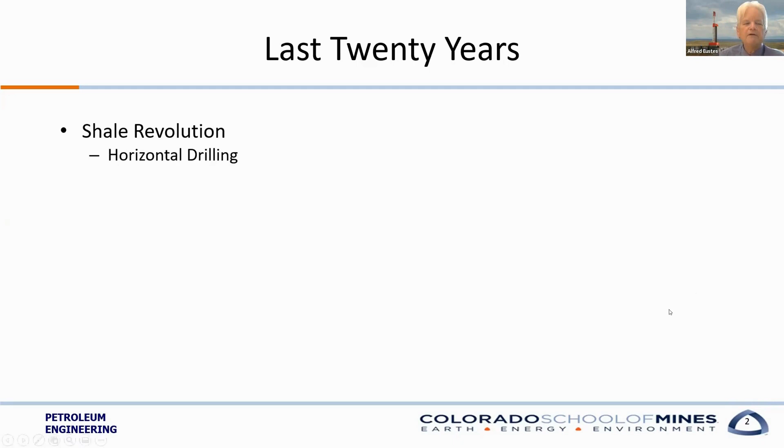So let's see what was going on. We'll start off with, in the last 20 years, it's been amazing, the shale revolution. George Mitchell put this together back in the Barnett Shale in the North Texas area, northwest of Fort Worth, Dallas. As they say, it took 17 years for this overnight success to happen. What they did was basically create a couple of technology changes: horizontal drilling - instead of just drilling straight through, they actually turned it and went 90 degrees by oil field convention. Then the completion techniques that were used, the use of casing strings along that horizontal section, the types of production equipment, and finally, fracture stimulation.

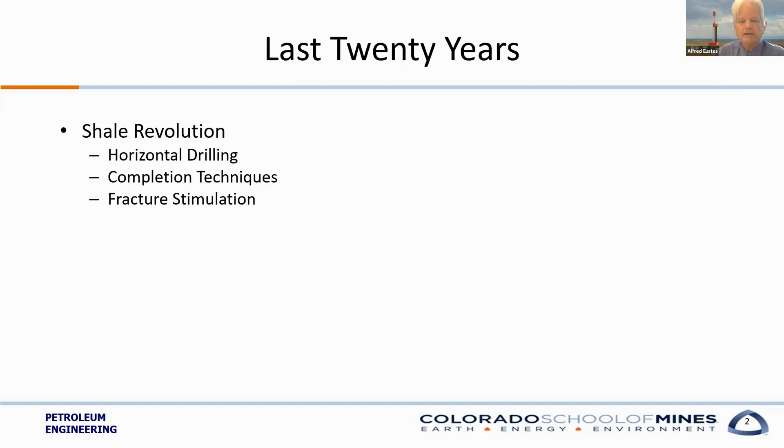We're drilling into rocks that basically had the same permeability, or actually less permeability, than sidewalks. So the idea was to create these fractures that would be, in essence, a superhighway for the small little dirt roads to feed the hydrocarbons into the reservoir, into the wellbore.

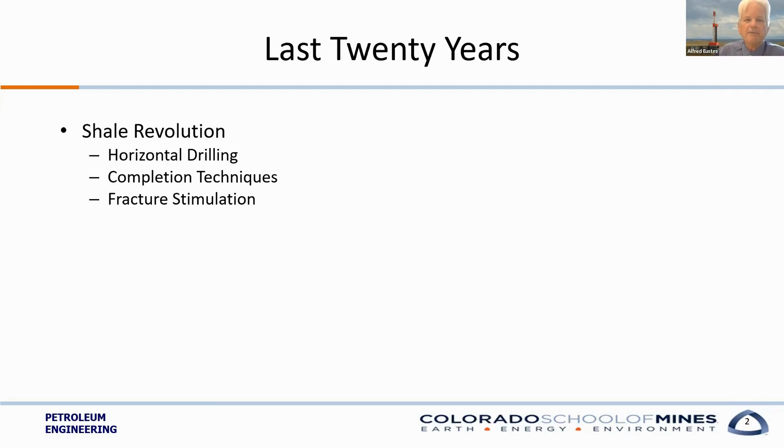What I'm going to focus on is the technology. I'm not going to look at the politics, I'm not looking at the issues of regulations and whatnot. I'm just going to focus on the technology that I see will be the enablers, and the continuation of those enablers as time progresses.

Let's start off by looking at the big areas that we see. This is from the Energy Information Administration, the EIA, with the different types of reservoir areas, basins that are being developed today. We typically see the big one is the Permian - that's where a lot of the oil and gas is being developed today. If you look at rig count, you'll see a boatload of them. The Niobrara here in Colorado and in Wyoming is a big area. Of course, the Appalachians with the formations in Pennsylvania, Ohio, and West Virginia. The Haynesville, which is super hot there in North Louisiana, East Texas.

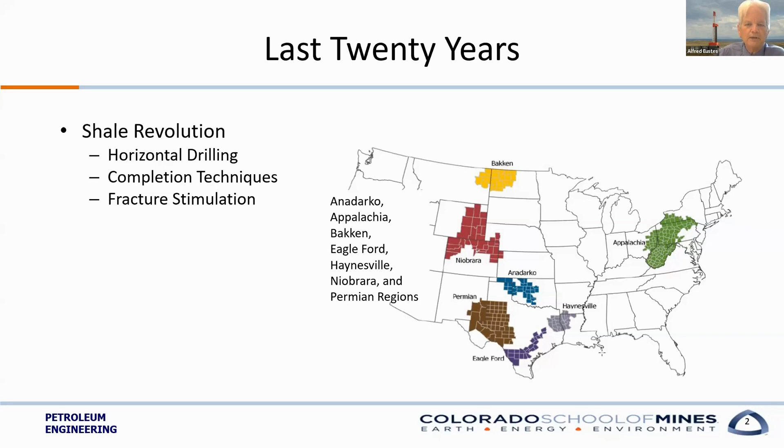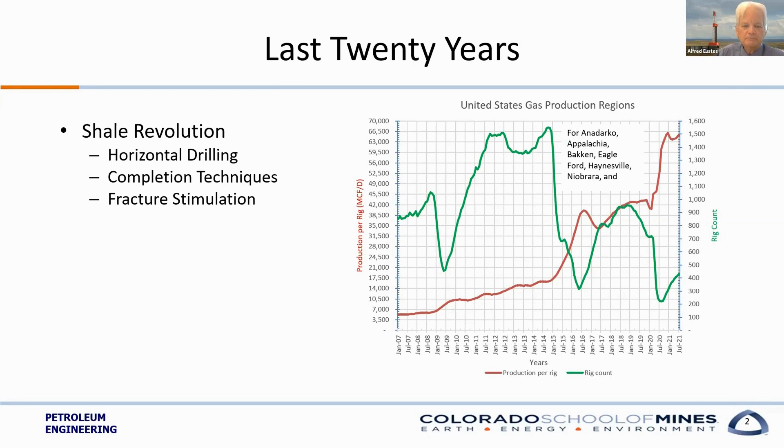And the question is, why is that? Is this a fluke? Well, if we look at the gas production, you can see the same sort of thing. You see the high volume of rigs and yet not real high production per rig. And yet around July of 2021, you're seeing maybe 430, 40 rigs and yet much, much higher production per rig. So this is not an anomaly.

What you're actually seeing is the focus of the technologies that we've used today. And this focus is going to be on horizontal drilling for our talk here. So what are the drilling enablers that have allowed us to spur this shale revolution? It starts off with drilling rig technology.

It starts off with drilling fluid improvements and the way we've done that. The bit designs are amazing, and how we apply those bits have been phenomenal. The directional drilling control and its equipment have been a real factor in this, as well as drilling data analytics, as well as drilling management.

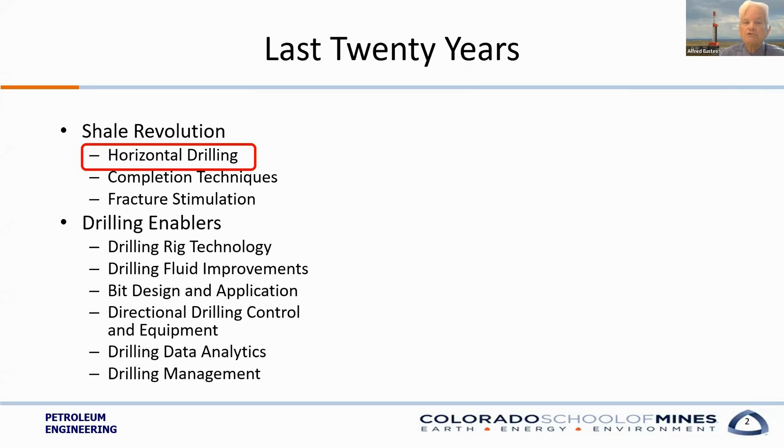So what we're going to do is focus on each one of these and see where they stand today and where they may be heading in the future.

So first question, what is a mad well? One of my good friends has talked about this. It's called a mad well. Is that an angry well or an insane well? Actually, what it is a mile a day well. That is, they can actually drill 5,280 feet or more in one day.

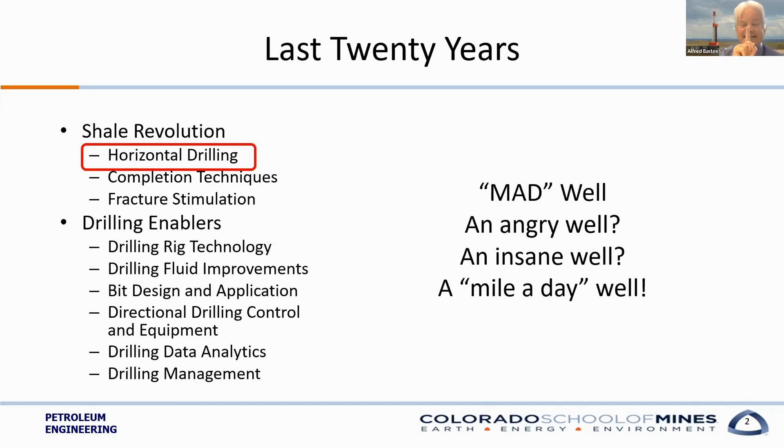Amazing improvements in operations. So let's talk about drilling rig technology. The first rigs I broke out in are now museum pieces. They were driven by mechanical means. They had Kelly drive systems, which are mechanical. Frankly, they belong in a museum.

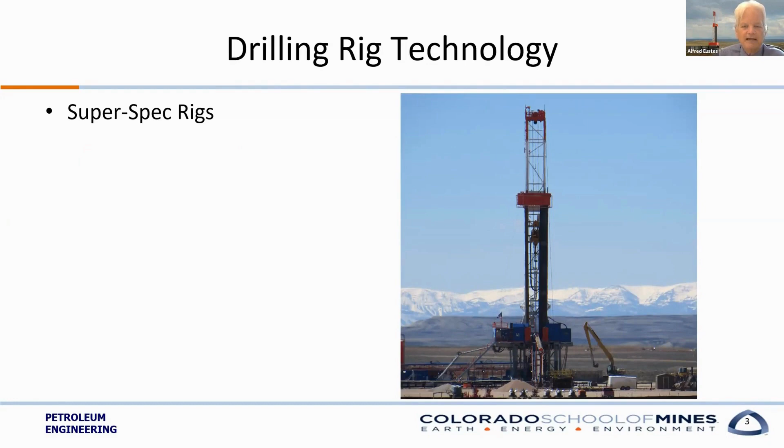Today we have super spec rigs, which are basically rigs designed to make drilling far more efficient, with a lot of stuff associated with them. The power requirements have gone up phenomenally. Back in August of 2008, most rigs were in the 500 to 1,000 horsepower classification, the hoisting system and the power associated with them. Today, it's doubled to 1,500 to 2,000 horsepower.

So what we're seeing is electrification instead of mechanical rigs. Typically what you'll see are diesel electric type of rigs. It used to be AC to DC power. Today we're seeing AC to AC synchronous power, which is allowing for far more efficient operations of drilling rigs, more horsepower, more power, faster drilling. In fact, you put more power into a rock, you're going to drill it. There's no question about that. So it's been amazing, that change of electrification.

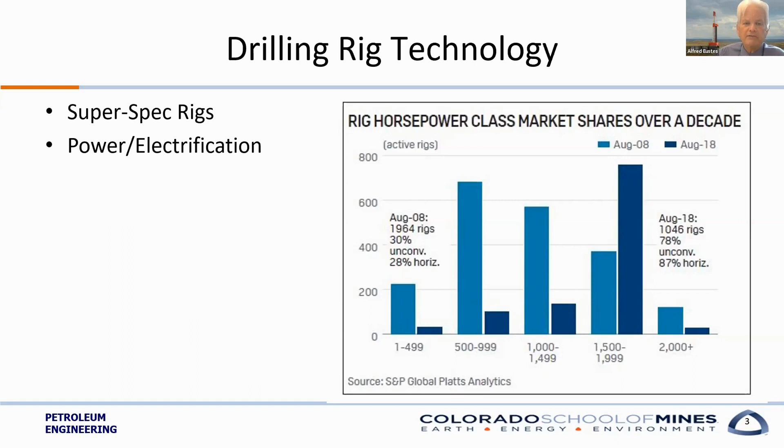One thing that's nice about electrification is that if you don't have a diesel electric system, you can also hook it to the grid, straight into the grid, and use that same power to power the rig. What's nice about that is it's a little bit more quiet, instead of having diesels running, you're just off the grid. Of course, you have to have the right locations for that to happen.

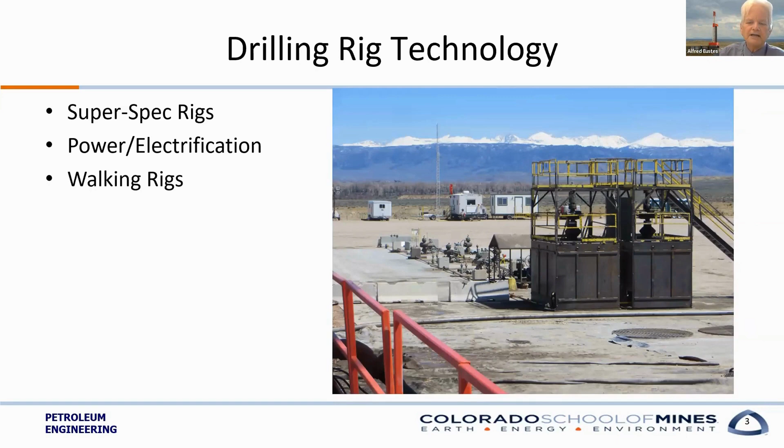Another thing that's fascinating about super spec rigs are the walking capabilities. If you notice in this picture, taken up in Wyoming, you see a whole series of wells in a line, and you can actually see them stepped over to the side. That's because rigs actually have feet these days where they can push down, shove over, and then set down.

So instead of having to disassemble the rig, move it over, and set it up, they can simply pick themselves up, walk over, set down, and drill the next hole. Even with stuff standing in the derrick, they can pick themselves up, walk over, drill, set down, drill the next well.

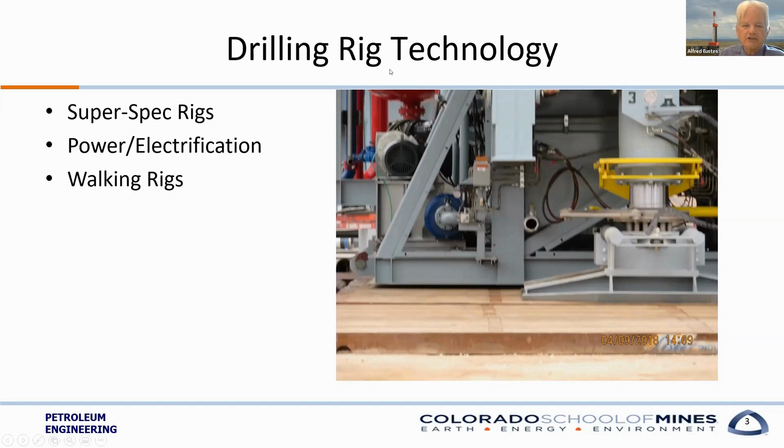In that respect, you can do what they call batch drilling, where you drill a whole series of, say, surface holes, that first section of hole with the same diameter, drill a whole set, walk back, drill the next section of holes, set them back, drill the last section, whatever number of holes you've got. What's nice is it's got amazing efficiency: keep the same equipment, drill a bunch of wells, and change the equipment out once instead of a whole bunch of times. So walking rigs are a big factor in drilling rig technology enablers.

Drill controls are really improving. It used to be all mechanical. You had big lever arms you used to control the brakes, throttle switches, and all that. Today it's almost all computer controlled, which means you have a lot more variability to tune in the right values.

And what's more, you have the information coming back to you so you can see what's going on. What's really nice is you can record that information for future reference.

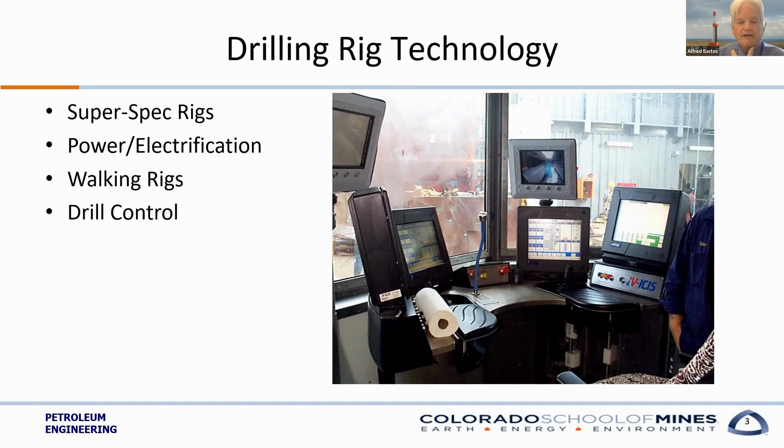It's pretty amazing, isn't it, for those drill controls? This shows you one for an offshore rig. I look at this and it just amazes me when people say, oh, the oil field technology, that's old hat. The answer is no, it's not. Look at that joystick control, complete operational visibility, being able to see what's going on.

It's amazing the changes in drilling control. They even let me, one time on an H&P flex rig, operate it. I'm just a drilling professor, and they said, there, go ahead, it won't hurt. So I actually ran the draw works to lift the blocks up, and they had a special device to keep me from banging it up at the top. It's amazing what they can do today.

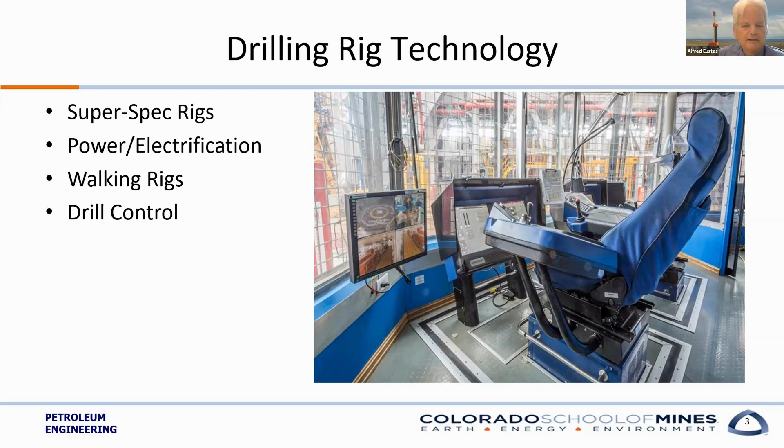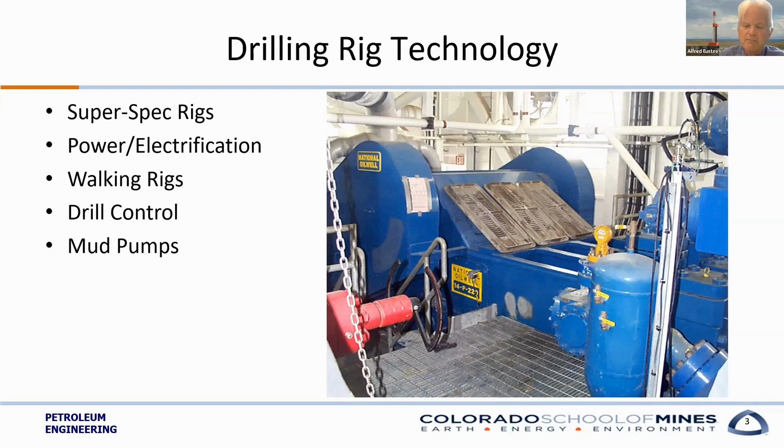Pumps—you've got to move drilling fluid through the system. Back in the day when I was running rigs, if we had a 3,000 PSI pump, wow, that was big. Today, with all the different power users downhole, such as mud motors and measurement-while-drilling tools, you need a lot more power down there. The way you do that is by pumping fluids at very high rates and very high pressures, and the net result is you see a lot of 7,500 PSI mud pumps these days. So it's not unusual to see big mud pumps out in the field.

The other thing we see today, as I mentioned about the hexagonal Kelly drive which slid up and down while the device rotated around it—today rigs have their rotation system actually ride up and down with the rest of the rig equipment as it slides up and down. These are called top drives.

Top drives can be electrical or hydraulic, and they run about 1,000 horsepower. They can be infinitely variable—instead of being fixed at some RPM, you can really dial in the numbers, and that makes a huge difference. The other advantage is you can continuously circulate, pumping fluid, even while you're moving the pipe in and out of the hole. So that saves a lot of issues there. Top drives are another drilling rig technology enabler.

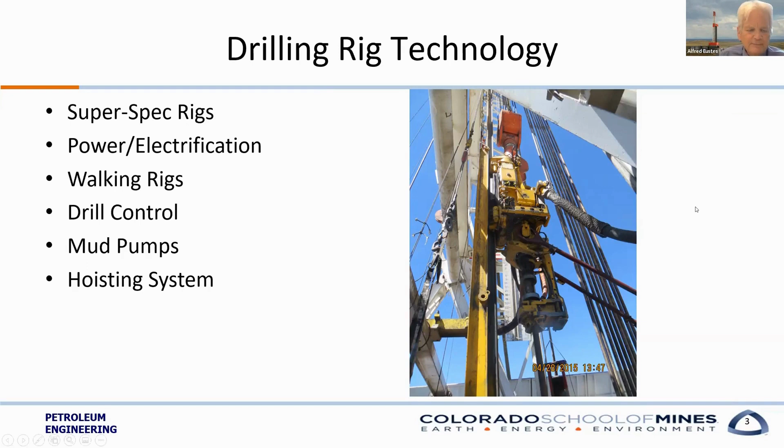Another area is rig automation. What you're seeing there, that little red thing, that's a robot. That is what they call an iron roughneck. It's used to go and actually screw the pipe together or unscrew it without having to move that piece of equipment off to the left called a tong, which is a very dangerous piece of equipment. Today, it's all robotic.

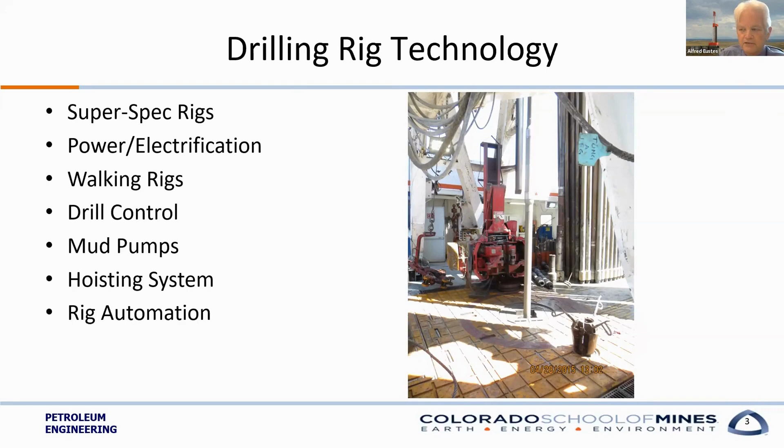And because it's robotic, and you have sensors to measure what's going on, you can automate it. So a lot of technology is being developed to automate these operations. Today, they have what they call drill-a-stand, where you can push a button and it will drill one stand, which you see on the right standing up, automatically from the time you make the connection to the time you make the next connection. Pretty amazing, and it's continuing to improve as time progresses.

Drilling fluids is another area of improvement. In the past, it was pretty much either water-based or pneumatic-based, basically air drilling, or oil-based. And when we talk about oil, we're talking about diesel. Talk about a nasty environmental hazard. Well, chemical improvements have made drilling fluids far better. In fact, it's apocryphal, but I always think about 70% of the problems you get with boreholes is probably related somehow, some way to your drilling fluid.

And so today we're seeing a lot more of, instead of a true oil, crude oil or diesel, a really highly refined synthetic, basically a linear alpha olefin or some sort of glycol mix or something far more benign to the environment and especially to humans drilling these holes, because some of these holes are really long.

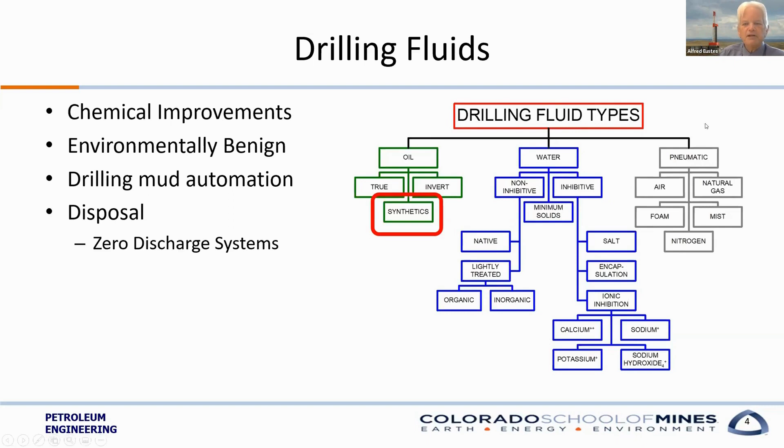And when you go horizontal, you could be going out 15,000 feet or more, in which case, imagine taking a piece of pipe and laying it down on a highway for 3 miles, and then rotating this end and expecting the other end to rotate along with it. Clearly, I'm going to have some sort of friction reducer. That's where the synthetics help, because they act as a reduction in friction so that my torsion is not so high that I twist the pipe in half, or I can slide it along and push it into position so I get force on the end of the bit to actually drill. Pretty good stuff they've got these days.

Another thing we're starting to see, which our friends at the University of Texas, Austin, have been developing, is drilling mud automation. In my day, you used to go out and measure the thing with a little funnel, which was pretty worthless, measure a weight indicator and so forth, and you'd have to have a crew out there to do that. It got done maybe once a day. You need better control. So this device is used to measure on the fly, as you're drilling, the different mud properties, the drilling fluid properties you want to keep track of in real time, such as your density, which is mud weight, your viscosities, your gas contents, and so forth.

These are drilling mud automation systems used to measure that, and if you can measure it in real time, you can also record it. That's another useful piece of information we'll find out more about shortly.

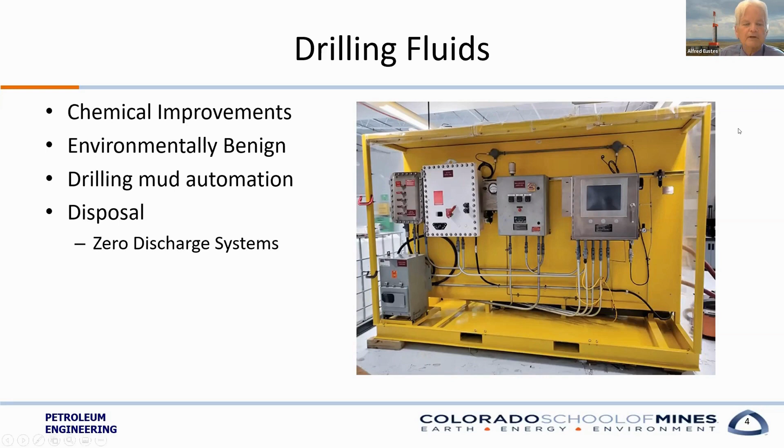The other issue, back in the day—44 years ago—we had these giant pits. Talk about an environmental nightmare. These giant pits would be there, and all the drilling fluid would wind up there, all the thread dope and oils from the rig, as well as the tobacco juice from all the roughnecks spitting into it. The net result was an environmental nightmare.

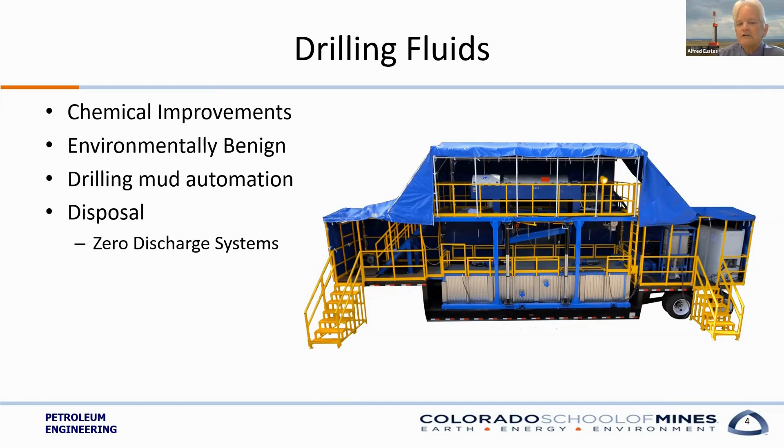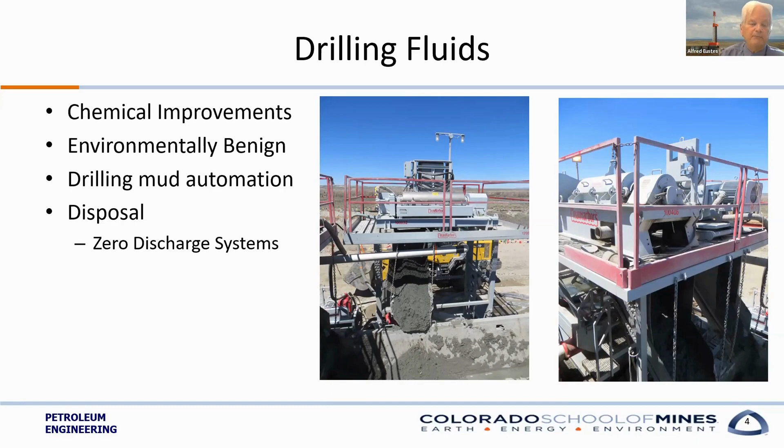So zero discharge systems are also very small. You can see it's basically a truck with some of these pieces of equipment on it, so you can have much smaller environmental footprint. That's a useful device, to say the least.

One of the big technology enablers I see is the evolution of bits. Back in the 70s and 80s, tricones were the king. They were like 80, 90% of the technology used in drilling, and if they lasted 120 hours, I'd be amazed.

The development of the polycrystalline diamond compact, or PDC bits, back in the 70s was actually designed by GE and the DOE, working on trying to come up with a better drill bit for geothermal drilling. They weren't that good at that time, but as the technology changed, you started to see an improvement, and people started saying, these things are diamond bits, they should last a long time.

So what they would do is design these bits specifically for a given formation so that they could drill efficiently within that formation. You can't have just any old bit drill any old formation and expect it to perform efficiently. You've got to tailor design it.

One thing about tricones is they're really tough to design because they're machined. PDCs are actually molded, so you can develop the mold and immediately change the design however you want - number of cutters, position of the cutters, number of blades and so forth - and change that relatively inexpensively. These things can last a really long time.

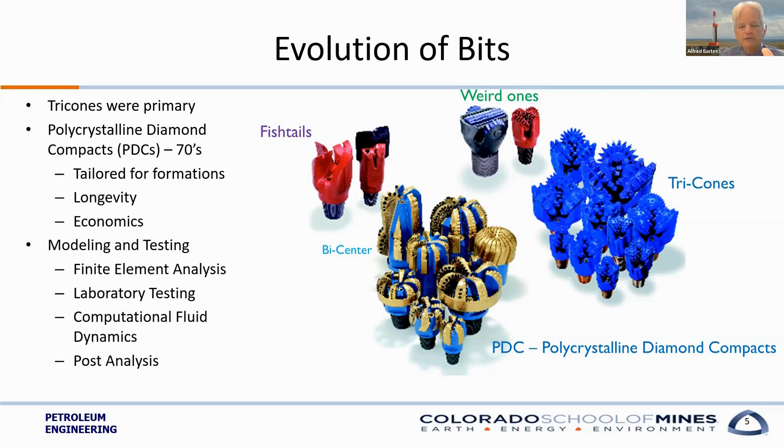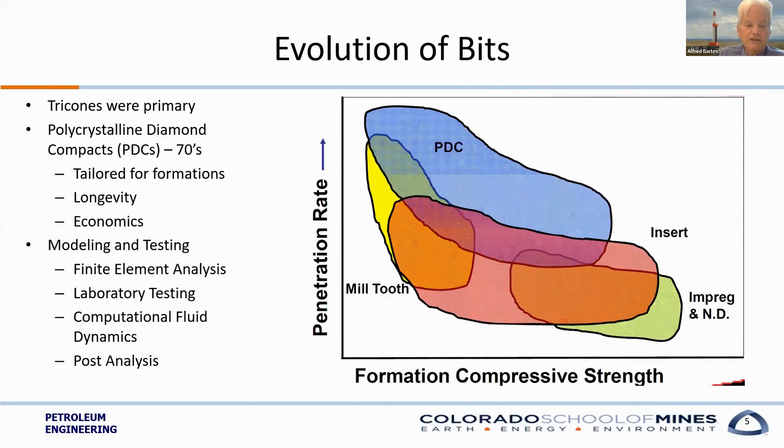If you get into really hard rocks, like drilling in geothermal, typically you get impregs and natural diamond bits. But the PDCs are primarily more in the sedimentary rocks - you're starting to see them used, and they're much faster. What's interesting to me is I'm starting to see that right edge of the PDC envelope pushing more into the harder formation compressive strengths, which you're going to see with the geothermal operations coming up. Here's an example of a post-analysis.

If you look, that's a real drill bit. That's a polycrystalline diamond compact. You can see the inside cutters are in pretty good shape. The outside cutters are pretty tore up. In fact, some are missing, some are cracked and so forth.

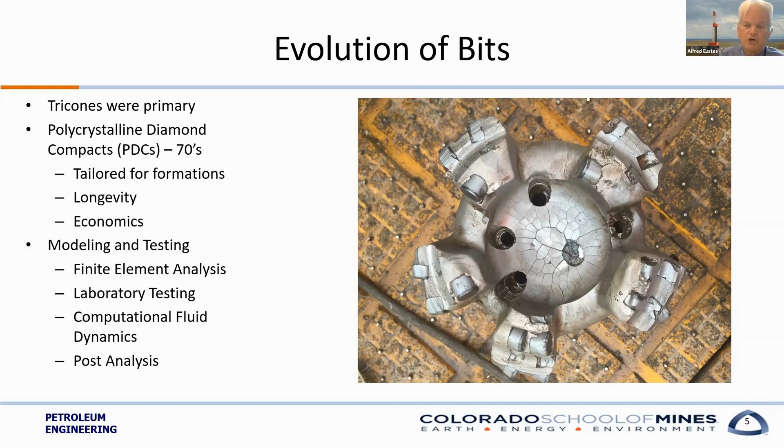That's probably a sign that this thing has been whirled. In other words, it kind of spun like this, and that outside edge probably got the tar beat out of it. So what does that say? Well, that says I need to do a better job of balancing the bit, as well as I probably have to speed it up, because whirl is typically because I'm not pushing harder on it. You know, I've got to push much harder on that bit.

How about the directional drilling? One of the things we're starting to see is improvement in drilling mud motors. Mud motors are devices that you put as part of your drill string right next to the bit. And as you pump mud through it, there's actually a rotor in there that has one less lobe than the stator it's in, which means it's got a gap in there. And that gap is a cavity that, as it spins, is a progressive cavity. So in other words, I pump mud in there at high pressure and it kind of pushes that rotor out of the way. And as it does that, it spins the bit. And that's where we need the power from the flow rate and the pressure to be able to get that thing to spin. Those mud motors allow us to do directional drilling.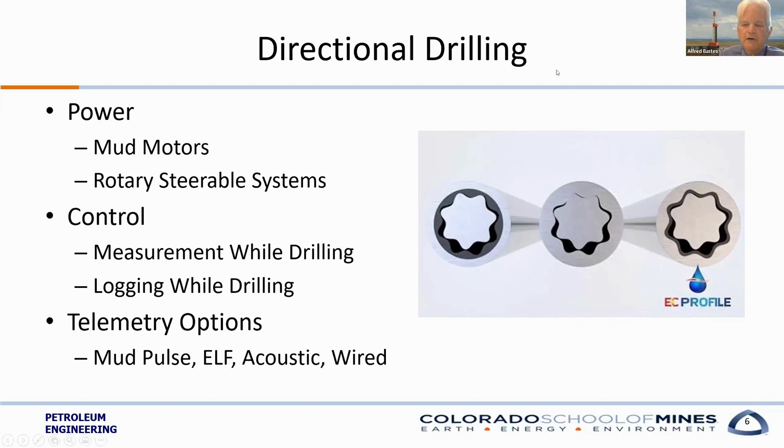One of the big ones that I see is the use of rotary steerable systems. And I'm going to back off that for just a second. Let me finish up with control. And that is one of the technology enablers: being able to measure what you're doing while you're doing it.

You know, it used to be that you would drill and you would end up basically kind of guessing what you were doing. Today, we've got tools down hole that measure what's happening. Which way is your bit pointing? What kind of forces are you putting on your bit? What kind of rotational speed have you got? How hot is it? Which direction is it going, and so forth? These are amazing technology enablers that basically is kind of like driving a car with your eyes closed versus being able to see where you're going.

In essence, measurement while drilling is doing that. And more importantly, it's also being able to keep track of where you are within the formation. That's logging while drilling, by using gamma ray or other measurement techniques that have been around a long time. But in this case, the logging tool is integral with the drill string, so you're busy measuring the properties of the formation while you're drilling. So if you happen to get out of the formation, you'll know it, and you can turn it and get it back into the formation.

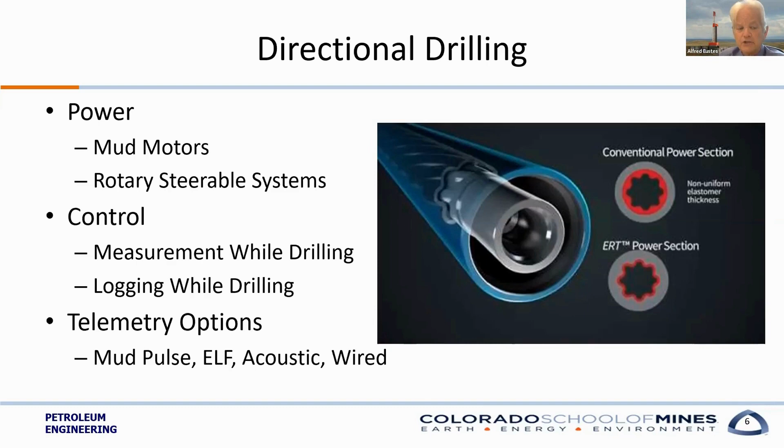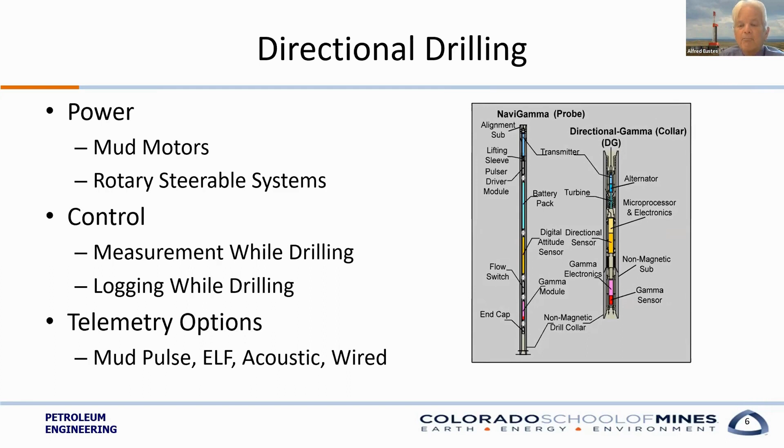You'll notice that in one case you have a battery pack for power. The other one has a turbine with an alternator to keep the power going downhole. So that's another reason you need those big mud pumps, to pump enough hydraulic power down to control these things.

Here's an example of where you might use an LWD tool. You've got the tool down there measuring the resistivity, the gamma ray, maybe the density and neutron if that's what you want. Because you're supposed to know what you're in, right? You know the characteristics of what you're drilling. If you get out of that, you can just admit, oh, geez, I'm up high.

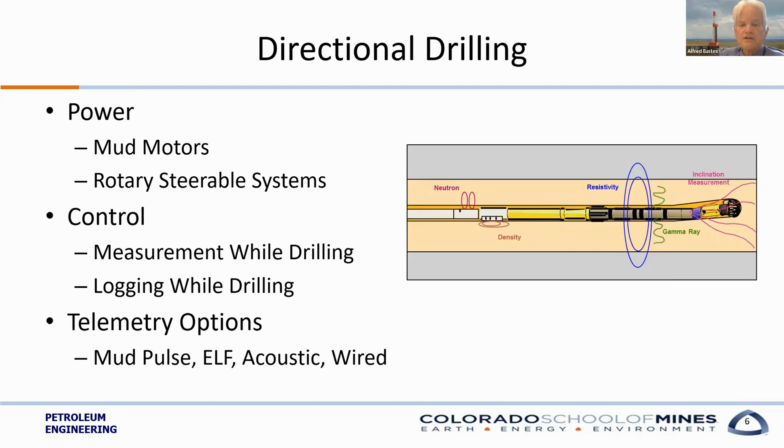I'll turn the bit and come back down, or turn the bit and go back up, or whatever it might be, or if I cross a fault or something like that. So this helps tell me what I'm doing.

The other thing you might see is telemetry options, such as what we see today, a lot of mud pulse telemetry, where they change the pressure in the system. The system is pumping mud at a relatively constant rate with a fairly constant pressure, and this causes pulsations in that pressure, so you get a pressure wave.

In that pressure wave, you can interpret what's happening. If you have a pressure wave up, it's like a 1, down might be a 0, back and forth, and you get a binary code like 1 0 0 1 0. Using that binary code, you can then decode what the machine is trying to tell you.

The future includes faster means, because right now you only get about 40 baud out of it. My PC Junior back in 1984 had a 300 baud modem, and we get maybe 40 baud, maybe better sometimes.

But there are better tools being developed. You've got extra low frequency radio waves, which are kind of limited to the same baud rates, but it eliminates the need for pressure pulses, which was good for air drilling and so forth.

Acoustic telemetry is also being developed, where you imagine hammering on the bottom of a piece of pipe, bang, bang, bang, and you hear the waves as they come back to the surface. You can listen for it, but the signal to noise ratio is kind of low, so that's kind of tough.

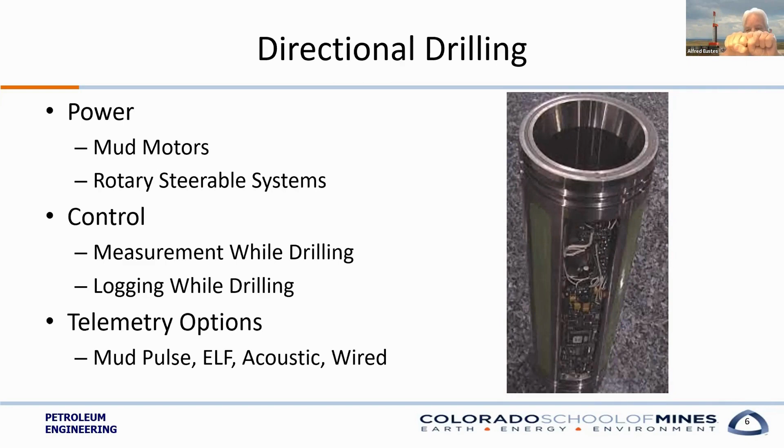Wired pipe has been very popular offshore. We actually have a physical wire that goes down to the sensors downhole. The problem is you can't have a direct connection back to the surface, because you can't screw the pipe together with a wire running through. So when you screw the pipe together, it butts up against each other and they use an inductance coil instead. That tends to make them kind of pricey.

Now let's go back to the rotary steerable system. This is a big one, and I think it's going to be a lot more of the future. When it comes to directional drilling, I can sum it up fairly easily: you either point the bit in the direction you want it to go, or you push the bit in the direction you want it to go, and more than likely you do both. So that's what these tools are doing.

As I mentioned with the mud motors, basically they have to be stationary relative to the borehole with the bit on an angle, so they sit there like this. I have to orient that thing in the direction I want to go, and push it as well as point it in the direction I want to go, which means I can't rotate. Well, that's called a slide. But if I want to go straight, I just rotate the whole thing, and the bit's sitting there wobbling back and forth, without any preferred direction.

Those of you with an engineering background probably recognize static friction versus dynamic friction. Static friction is like when I put my hand on my desk and push - it doesn't go anywhere until I push hard enough and it slides. Once it starts sliding, the friction goes down. That's dynamic versus static friction.

Mud motors that are in slide mode have a lot of friction associated with them. If I could somehow continue to rotate my string, it'll be in continuous dynamic conditions, and with that dynamic I can basically push it further.

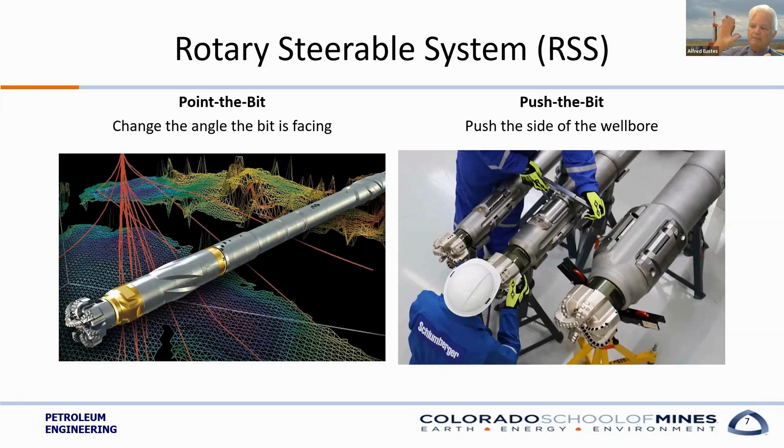Rotary steerable systems are designed to either keep the point of the bit as it rotates - it's kind of like the bit's pointing this way, and as you rotate, the bit's rotating backwards at the same speed. The net result is you're pointing the bit in the direction you want it to go, versus push the bit. If you notice on the right, you see little flappers on the side, especially that big one. What happens is it flaps out when it wants to push in that direction, and then as it rotates around, the flapper goes back in. So it's flap, flap, flap, flap, basically pushing the bit in the direction you want to go.

Drilling data analytics is a big one, and I'm seeing a lot of this right here. There are many sensors, both downhole and surface. A couple of these pictures are ones I've taken on the surface - the flow indication shows how much flow is coming out, the weight indicator shows how much force you're putting on the bit, as well as how much is on the rig, how fast you're pumping which says something about your flow rates, and how fast you're rotating - there's a sensor for measuring that.

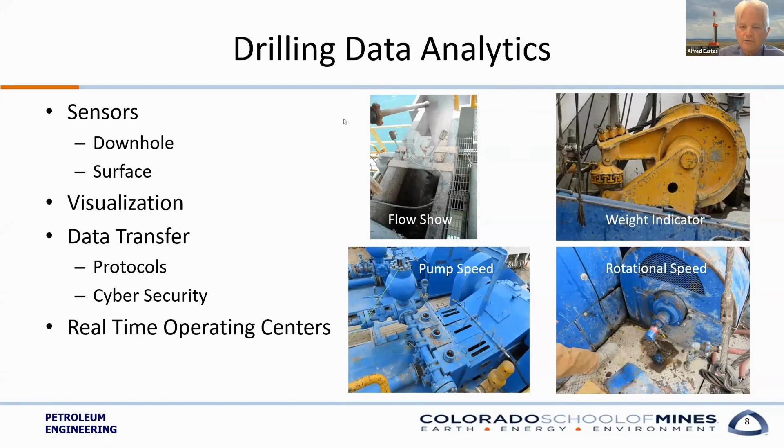Being able to measure that, as well as downhole as already mentioned, has been useful, because then you can measure and present this in terms of visualization. These are the current visualization techniques - you can see it's linear charts as well as digital outputs and so forth. Typically these things are push button that you can do.

What's kind of useful about this is, as I mentioned, you can record this and transfer that data to wherever. So you could be halfway around the world, pull out your phone, dial into whichever company you're using, and be able to see what's happening on your rig in real time.

Pretty amazing. The only thing I have an issue with, and this is something I know the industry is working on, is keeping hackers from being involved - cybersecurity. That's a big area that I think needs to be addressed.

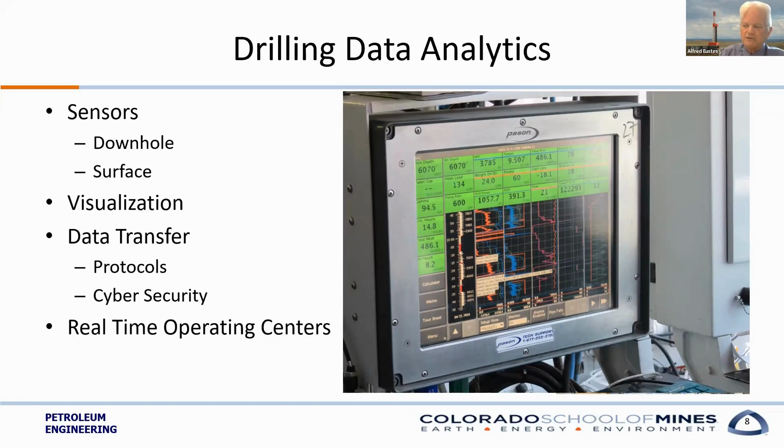As I mentioned, you could sit there and watch these things in real time. What you could do is set up an office somewhere and have very experienced subject matter experts watching a whole series of operations going on, whether for drilling, production, stimulation, or whatever. These are called real-time operating centers. They were very important, but I'm starting to see them slough off a bit. Instead of being physical, especially post-COVID, people are just doing it from home, where they can actually monitor what's going on in real time.

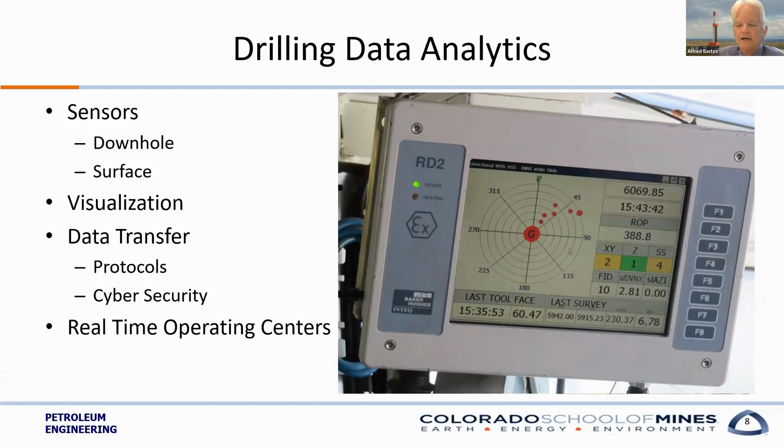Here's an example of real-time directional drilling. You can actually see where they're measuring what's happening - you've got the depth, the time, the tool face, which is not an insult - it's basically which way the bit is pointing. At 60 degrees, it's kind of going up and to the right. It gives you all sorts of information about what's happening while you're drilling.

So you use this data - what am I going to use this data for? Well, there's a thing called mechanical specific energy. Imagine how much energy it takes to break a unit volume of rock - basically energetics. If it was perfect, it'd just be the compressive strength of the rock. So if I've got 10,000 PSI rock, I'd have 10,000 PSI worth of energy that I would use. Well, that's not quite true, but it's close.

You've got a lot of energy in there. And that energy basically shows how I'm pushing into the system and making the operations faster.

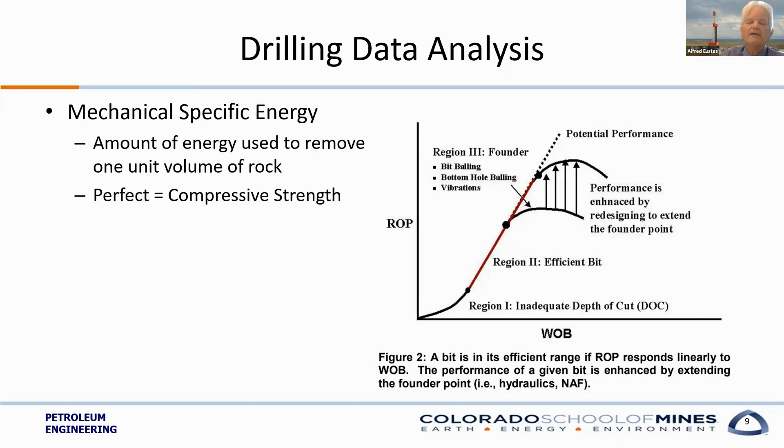What I can do is look at the weight on bit, ROP, and that mechanical specific energy, and determine whenever you see it dive off of the linear trend, that orange or red line, that's an indication something is going on that's limiting me. By using drilling data analysis, I can analyze what's limiting me and redesign the system to eliminate that. Then when I get back to drilling, I'll drill faster. I reach another limiter and continue that process until I get this thing going as fast as possible. That is what drilling data analysis, among many things, does for you.

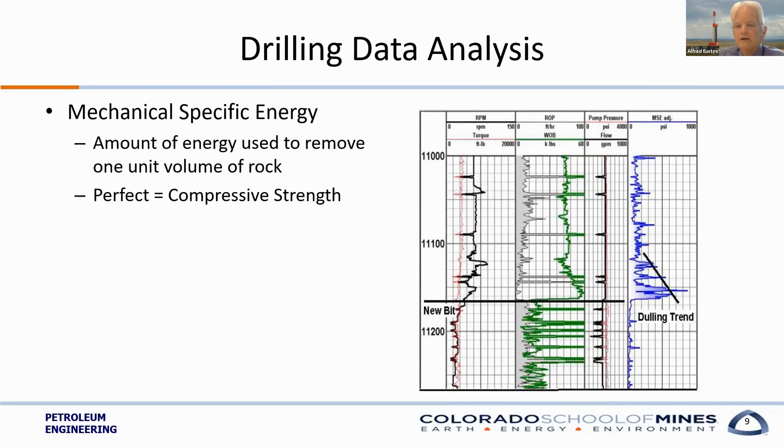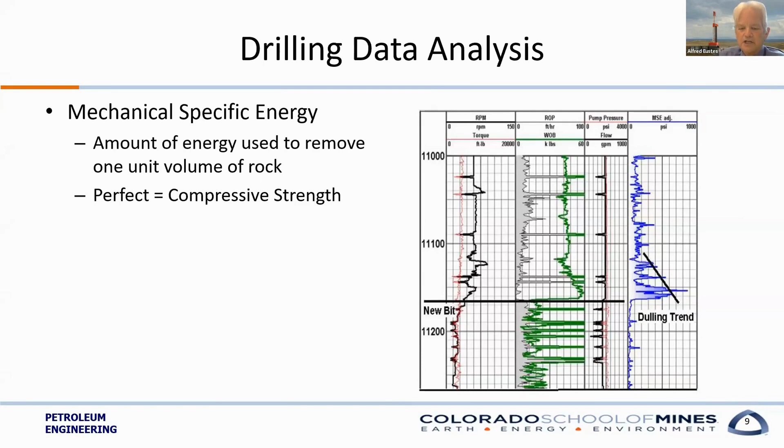Here's an example of the MSE. If you look over here on the right, you see that MSE trend versus depth on the left. You can see the other operational parameters. Notice the energetics are increasing as you pass 11,100. Why? The bit's wearing out. You can see the bit's wearing out, so they say, time to change our bit. They change it to a new bit, and you can see the energetics are far better in terms of less energy per unit.

Another example is vibrations. When things happen downhole, here's a start to vibrations and all that kind of stuff, that's a lot of energy being wasted. That's not going into rock penetration, it's going into moving all that equipment downhole. By changing the RPM, changing the weight, and doing other things, you can basically eliminate those vibrations or at least minimize them. Or in this case, they actually broke the bit and had to pull it out of the hole.

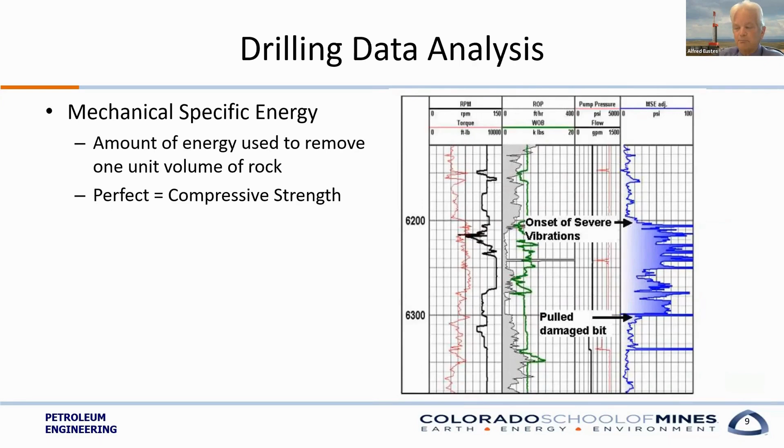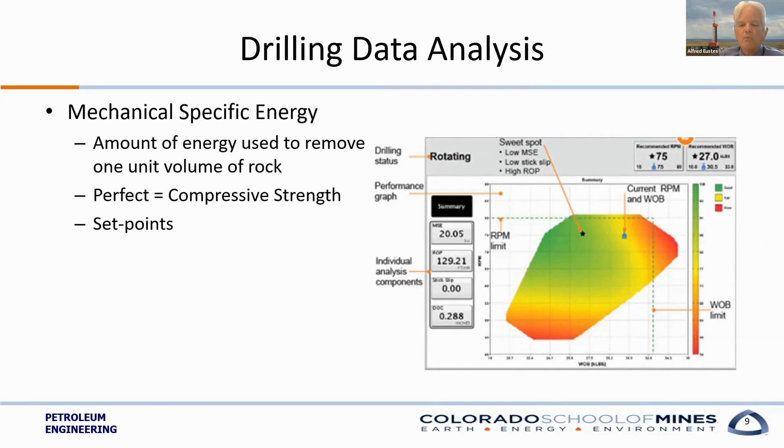What you can do is develop what they call set points. Set points are the perfect RPM and weight on bit that give you the best energetics, meaning the lowest mechanical specific energy, the lowest vibrations, and the highest ROP. By doing this analysis, you can figure out, maybe I should be a little lower. The RPM looks okay, but maybe a little lower weight on bit allows me to drill better. Doing this drilling analysis, like this heat map right here, is a perfect example of where I might be able to do better.

When I look at the other issue in drilling data analysis, drilling is productive because I'm creating a wellbore. Running casing is also productive, even though I'm not drilling, I'm still creating a wellbore. But if I lose circulation, stick my pipe, the wellbore collapses on me, or I take a kick, these are called non-productive times. If you can define them, good luck on that - sometimes that can be challenging. The idea is to minimize that.

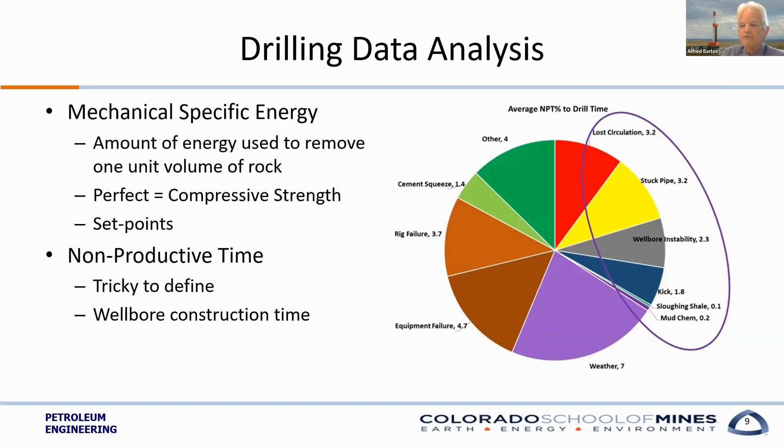For instance, if I have a lot of lost circulation, like we see with geothermal wells, if there are ways to minimize that, that's less wasted time. Time is money. So you're starting to see where we spend a lot of effort looking at the drilling data, trying to figure out at what point does it make sense to really spend our time on sloughing shale. Well, not according to this - we're only getting like 0.1% of my drill time, but lost circulation is about 3.2% of my time. Stuck pipe is another problem. So these are things to look at.

Drilling management, one of the things we look at is defining key performance indicators, or KPIs. By doing that, you can say, okay, what am I wanting to improve? Say, for example, ROP - and I'll warn you, there's a lot of interpretation with ROP. You might say, that's just how fast you're drilling. Really? Minute to minute? Second to second? Are you talking rig to rig? Spud to rig release? What are you talking about for ROP? Same with NPT - that's a tricky one to define too. Is slow drilling NPT, or is it just part of the drilling operation? That's a good question.

And so one of the things we look at is what we call days versus depth.

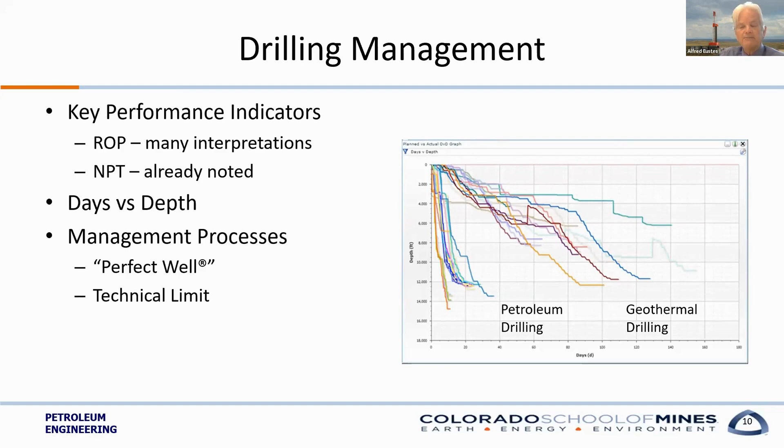You notice those areas where it looks kind of flat - a lot of times that's defined as your NPT. This is part of a report we put together for NREL on geothermal drilling, and it's interesting to see the efficiency of petroleum drilling versus geothermal drilling. A lot of the flat times you see for NPT are lost circulation events. So what does that tell me? I've got to manage my lost circulation on these geothermal wells, among other things.

There are many different technologies and management techniques out there. I'll mention two. J. Ford Brett, president of Petroskills, defined something called perfect time - basically, based on your rig, how fast can you drill a hole, how fast can you get out of the hole, how fast can you do casing and cementing safely and environmentally benignly, based on the physics of the situation. The perfect well would be one where the actual well drilling time divided by this perfect time approaches 1.

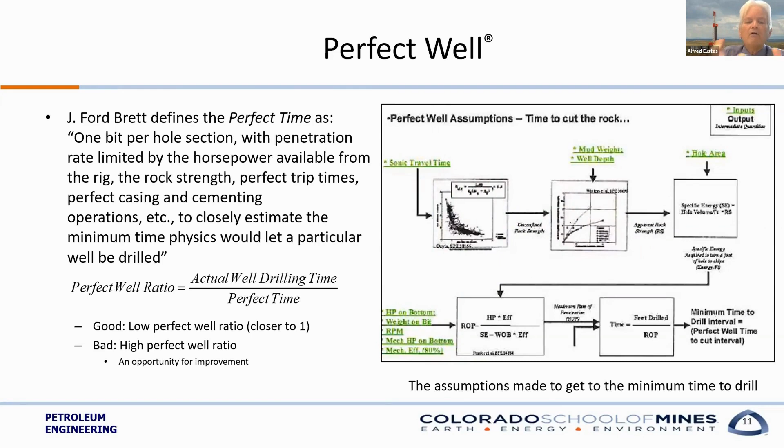Basically, it's a way to look at how close are you, and what do I have to do to get better at that. Another one is called the technical limit. It's basically including human expectations, hopefully not your biases, but it supposedly describes an ideal standard of drilling given site-specific conditions - like here in Wyoming, a perfect team, perfect drilling conditions, perfect tools and so forth. The idea is that technical limit is how fast you can drill if everything goes right. This evolves and you must continue to update it.

One thing I find very interesting - John de Wardt, a good friend of mine, has been working on identifying different aspects of lost circulation, lost time. For example, you've got conventional lost time, or NPT, as we defined it. But there's also what they call invisible lost time. Imagine if it takes you 5 minutes to make a connection because the devices you're using are clunky. Wouldn't it make sense to improve that so you can make a connection in 3 minutes? That 2 minutes is invisible lost time - you wouldn't see it, but you can visualize it.

When you look at actual well durations, you've got the best of the best, and then best in class. Best of the best is, within a field, the best one we've ever done - we should be able to hit that every time. Best in class might be the types of wells you're drilling. The technical limit is where you eliminate as much invisible lost time and NPT as you can. The maximum theoretical performance is when everything goes right - good luck on that. And then, of course, instantaneously creating a borehole - in that case, you wouldn't be going to the Colorado School of Mines, you'd be going to the Hogwarts School of Mines, because that's the only way that's happening.

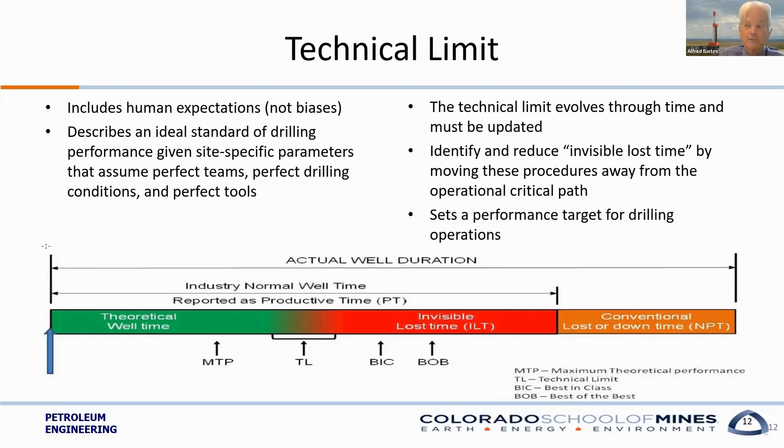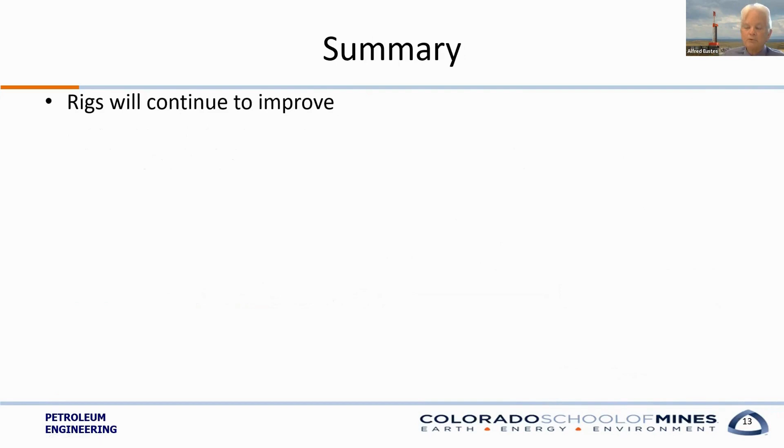So let's sum up everything I've mentioned today. I think rigs will continue to improve - they have to. You're seeing a lot more improvements, the technology being developed, improved, changed. The way I see it, rig automation will continue to grow. If you're part of the Society of Petroleum Engineers, join the Drilling Systems Automation Technical Section - you'll learn far more about rig automation there, that's where the state of the art is. It's fascinating, and there are other technical sections in the SPE you might be interested in. I see rig automation continuing to grow. Is it challenging? Absolutely. Is it difficult? Yes. But there are roadmaps out there, and I encourage you to go hunt them up.

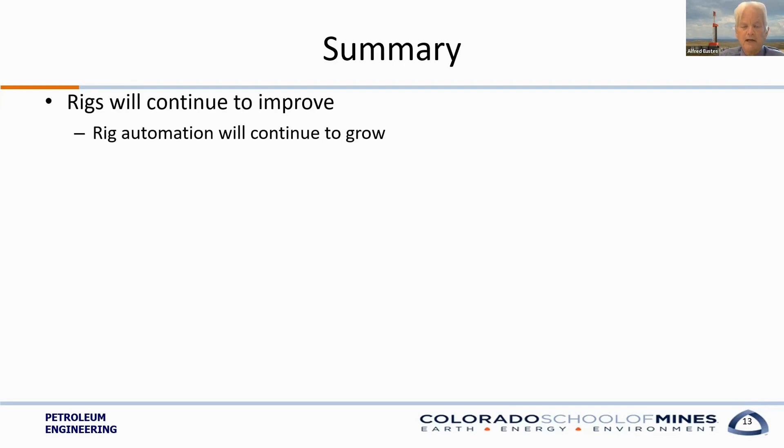Bit design and drilling technology and processes will continue to allow for faster drilling. It's amazing the changes I've seen. I remember being out on a rig a couple of years ago and noticed the top drive coming down - I thought, good gravy, are they tripping? No, they're drilling. Amazing stuff. And it's all because they've got the right bit design for the right rocks, the top drives, the mud motors and mud pumps, and the directional drilling equipment all just humming along.

So what does that mean? Shorter location times, which is, in essence, when you start thinking about environmental impact - if you're drilling a well and it takes you 2 months versus 7 days, which one is going to probably be better? The 7-day well.

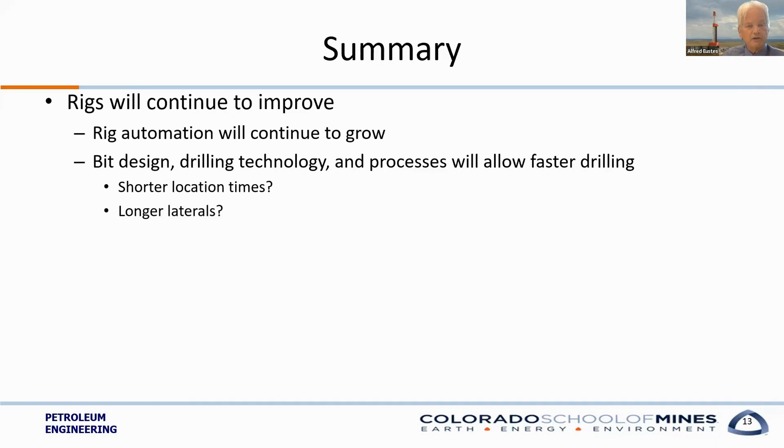Get longer laterals. Right now, 10,000 feet is pretty common. 15,000 feet is pushing the edge of the envelope because of friction issues and so forth. Could it be 20,000 feet? Maybe more. Who knows? And maybe we might even get 2 MAD wells, that is 2 mile a day wells.

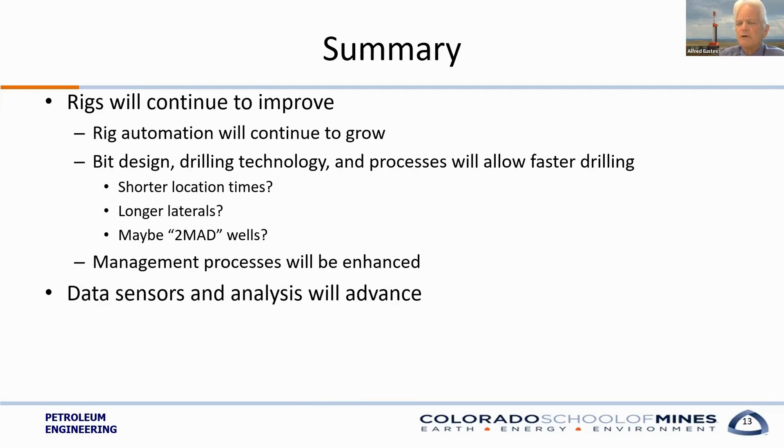Who knows? Management processes will be enhanced. You see a lot of this if you go to conferences around the world in drilling and so forth. A lot of companies have developed drilling data analysis to come up with better ways to manage it, because data sensors and analysis of that data will advance. Data sensors right now are probably one of the limiters on drilling rigs because they have to withstand a lot, and the sensors are not picking up great data, but they're useful.

I think drilling data analytics will uncover insights that will improve operations that we never thought of before, never been able to come up with before. I think you'll see that as time progresses. I know here in academia, where I'm part of, we do a lot of this kind of figuring out what's going on. I've been working with NREL on a project on that.

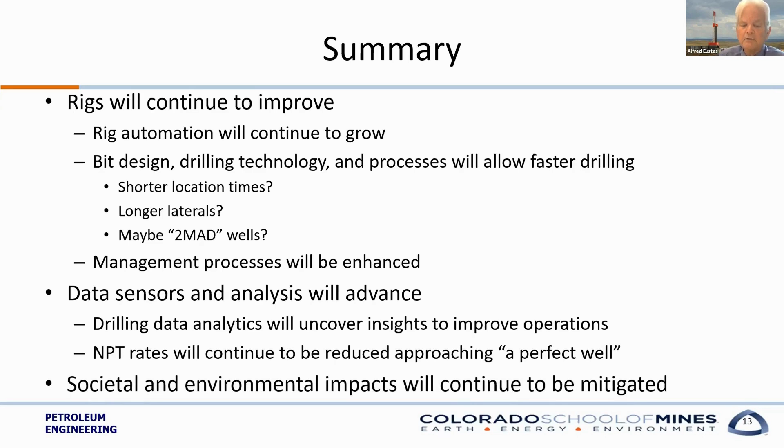Very fascinating to see. NPT rates will continue to be reduced, approaching that perfect well condition to be able to do the best job that they possibly can. And I do believe the societal and environmental impact will continue to be mitigated as time progresses.

It's been a lot of fun. I really appreciate being able to share my thoughts on this and what I visualize the future may bring as we drill into the future. And I would invite any questions I can answer, or I can question any of your answers, whatever you wish.

So with that, thank you very much. And John, how do we go from here?

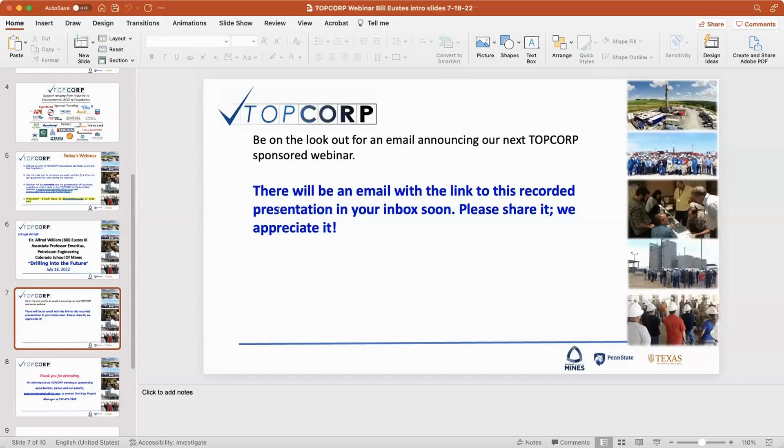I'm going to read this, Bill. Maybe you have access to it as well. I haven't read this one over first. It says, one topic that was not discussed today was cementing into the future. The industry is, at this moment in time, seeing the shift from API Class A cement to Class L blended cement, while at the same time, the construction industry is seeing their ASTM C150 type cement being changed to a blended cement type. Now, there's a lot of acronyms there. Do you have any insight into concerns related to these cement changes? And how might we make analysis today on how these new cements will perform in the future?

That's actually an excellent question. I hadn't put cement in there because I hadn't seen a real change in cement for the last 200 years. I mean, we're still using Portland cement, for goodness sake. I do know, I think it was one of the labs - God, I can't remember the name of it. It's one of the hazards of getting old. But the lab up in Argonne, is it Argonne? I think it's Argonne, in Chicago. They're doing some cementing tests and improving cement operations.

You're right, I've never actually heard of this Class L. I'm going to have to look that one up. So thank you for sharing that information with me. I've never heard of it, so I can't answer that one - that's the thing about doing these webinars, you learn too. But I do think you're right. I think the issue of actually sealing the annular bore between the pipe and the rock is a real key factor, especially when you do fracture stimulation. I've seen cases where the fractures tend to migrate up and down the pipe, just within the formation.